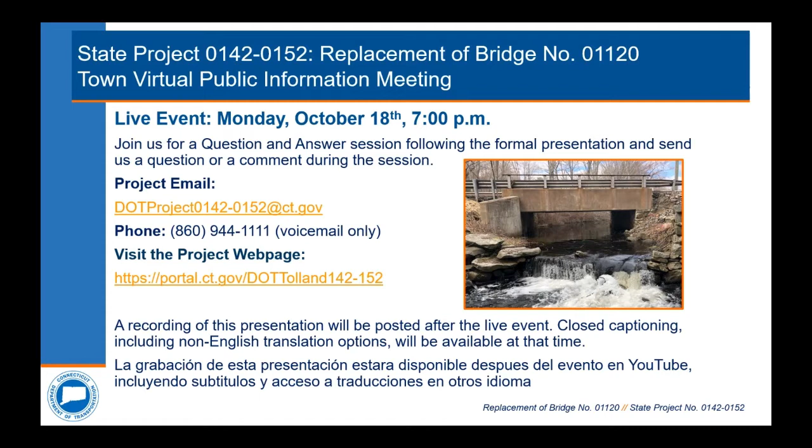Before we get started with the main presentation, I want to walk through the goals and format for tonight's meeting. First, I will explain the different ways you can interact with the project team during the meeting. Next, I will introduce the project team, including department leadership and our consultant liaison engineering team. Then we will have the technical portion of the presentation, covering the condition of the existing structure, the purpose and need for the project, and the recommended design solution, which has progressed to a 30% design level. We will also explain the rights-of-way process, followed by a live question and answer session.

There are three ways that you will be able to communicate with us during the live question and answer session. Questions can be submitted via email, by calling and leaving a voicemail, or if you're joining us on Microsoft Teams, you can use the chat box on the right side of the window. The project email, voicemail, and chat box will be screened by the project team during the question and answer session. All questions will be posted in the chat window, and all questions and answers will be read aloud. Questions may be asked at any time during the presentation, and they will be answered at the end during the question and answer session. The primary means to communicate with the project team will be via email.

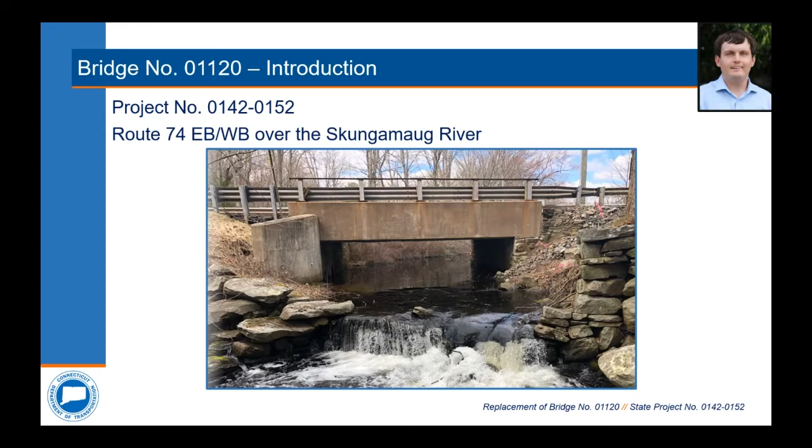I'll be going through some project specifics of the current condition of bridge number 1120, which carries Route 74 over the Skungamaug River in Tolland. I will also present the proposed work under state project number 142-152, which has been initiated to replace existing bridge number 1120.

Bridge 1120 is located here as seen highlighted in orange on the screen and carries Route 74 eastbound and westbound over the Skungamaug River. The Skungamaug River flows in a north to south direction. The bridge is located a quarter mile east of the Country Butcher. The project site limits include both approaches eastbound and westbound along Route 74 as outlined in red.

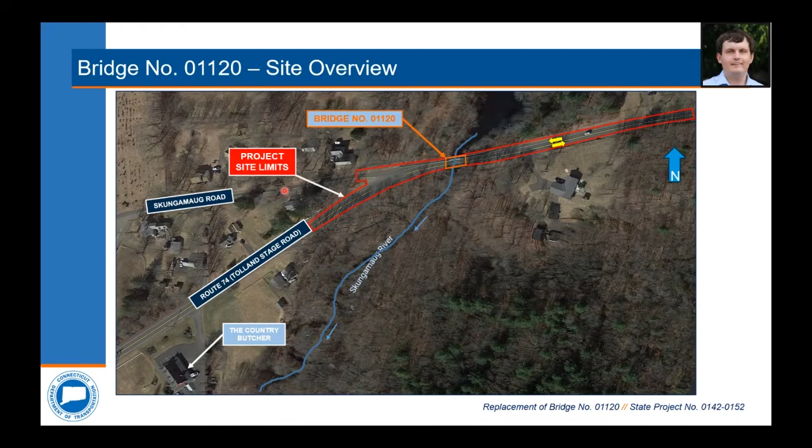In the vicinity of the project site, the land use is primarily residential. There is one residential street, Skungamaug Road, located to the west of the bridge.

This is a plan view of the existing bridge. The bridge was constructed in 1916 and carries an average of 2,700 vehicles per day. The bridge carries a lane of traffic in both the eastbound and westbound directions along Route 74. The curb-to-curb of the bridge is 22.5 feet and consists of a single span with an overall length of 24 feet. The bridge is supported by masonry abutments located on both the east and west side.

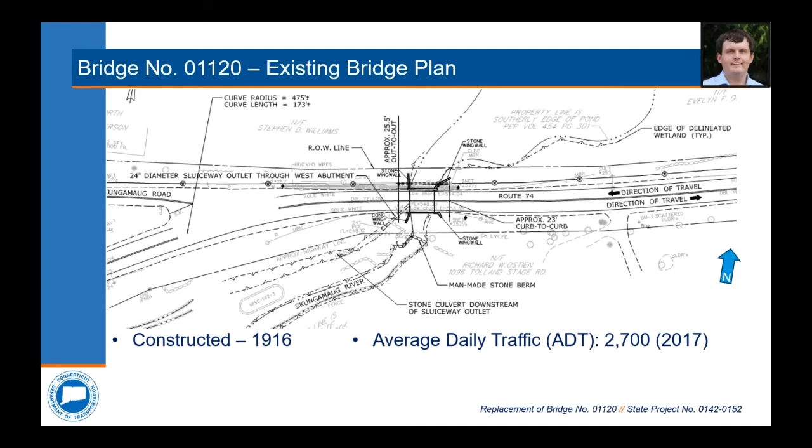Additionally, there's an existing 12-inch water main that runs parallel to the north fascia of the bridge, and overhead utilities are also located on the north side of the bridge.

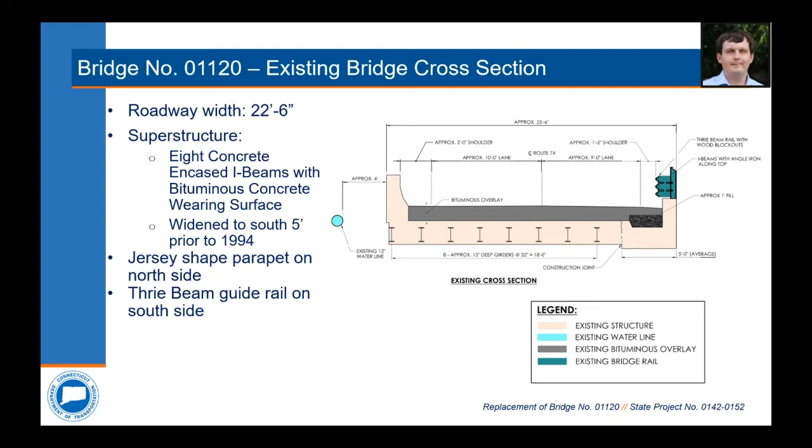As previously mentioned, the existing bridge provides a 22.5-foot roadway and consists of a 10-foot wide westbound and 9-foot wide eastbound lane. The original superstructure consists of 8 concrete encased I-beams. The structure was widened by 5 feet to the south side at some point prior to 1994. The structure is topped with a bituminous concrete overlay. The bridge has a jersey-shaped parapet to the north side and a thrie beam rail with wood blockouts on the south side.

Here you can see the existing south bridge elevation. The bridge has a span length of 24 feet, as previously stated. The structure is supported by stone masonry abutments with an unknown foundation condition, as there is very little information and limited as-built plans of the original 1916 bridge construction. There's moderate potential for scour concerns on this site based on a previous investigation performed in 1998.

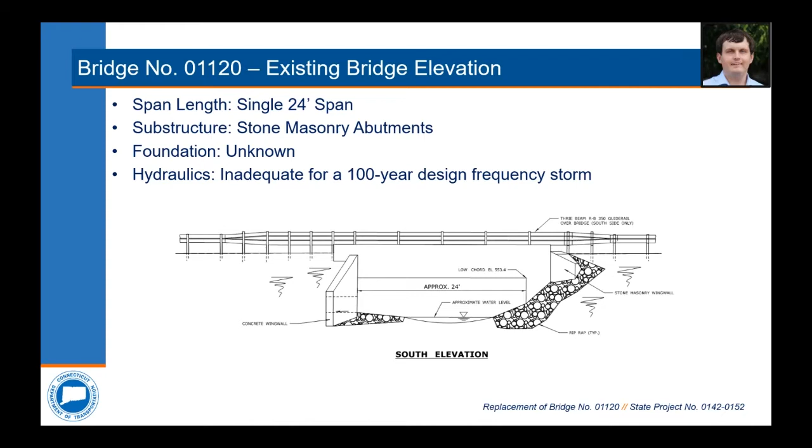As for the hydraulics of the existing site, the existing structure is inadequate as the 1-foot minimum underclearance for the design storm is not met. The design storm is the 100-year frequency storm event for this bridge.

As Brianna previously mentioned, during biennial inspections, the bridge inspectors determine condition ratings for each of the major elements of the bridge. Based on the bridge inspection performed in 2019, the deck is considered to be in satisfactory condition overall. The superstructure was noted to be in poor condition, and this rating is a result of deterioration on the bottoms of the concrete encased I-beams. The substructure and approaches are noted to be in satisfactory condition, and the channel and channel protection around the bridge was also noted to be in fair condition.

The inspectors also look at other elements of the bridge, such as roadway alignment and deck geometry. On this bridge, the inspectors noted the condition of the deck geometry as intolerable, as the existing bridge width is narrower than the approach roadway width of Route 74. Because of this, the bridge is considered to be functionally obsolete.

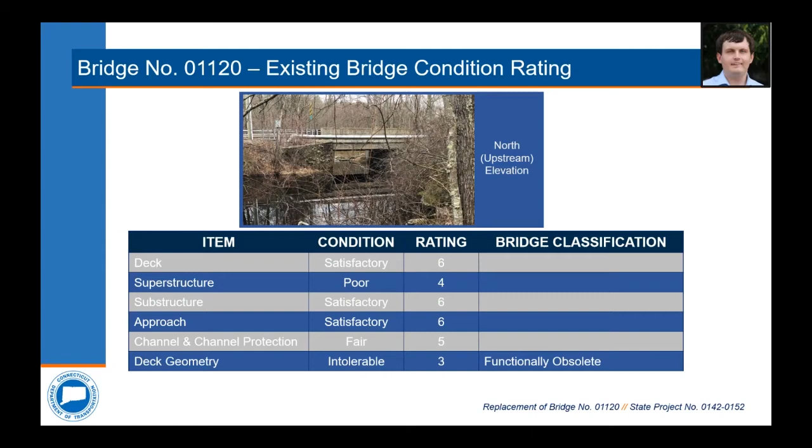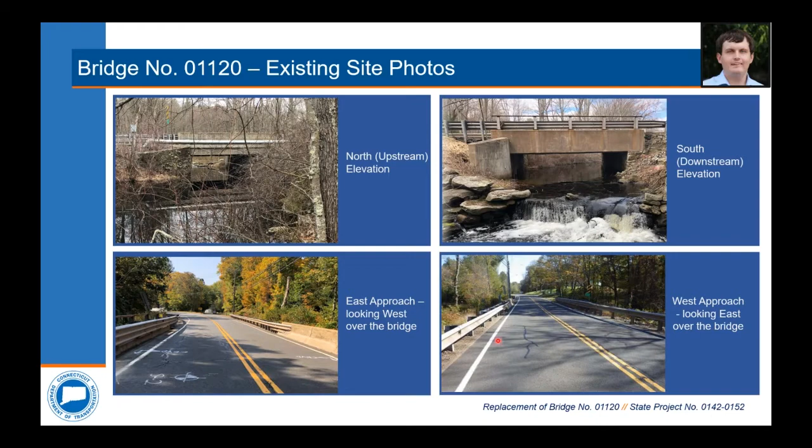The bottom left shows the east approach looking west over the bridge. In this photo, you can clearly see the overhead utilities located to the north side of the bridge. The bottom right shows the west approach looking east over the bridge.

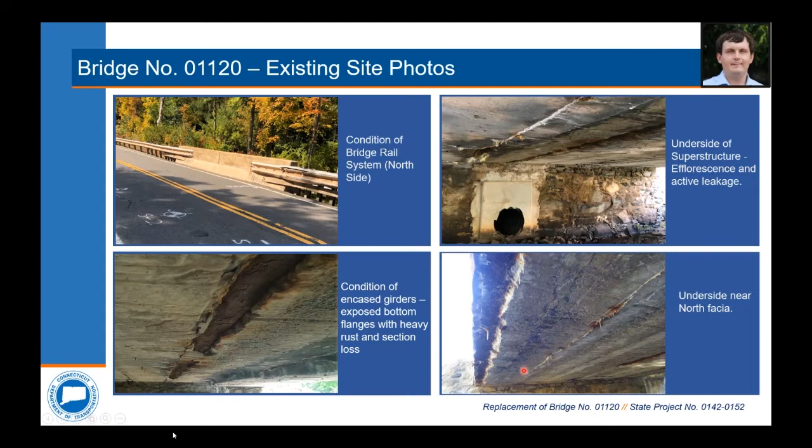The bottom photos show the typical condition of the concrete encased girders. As you can see on the bottom left photo, there's exposed bottom flanges with heavy rust and section loss. The bottom right photo shows the underside near the north fascia. There's evidence of efflorescence, which indicates dampness and active leakage through the deck surface.

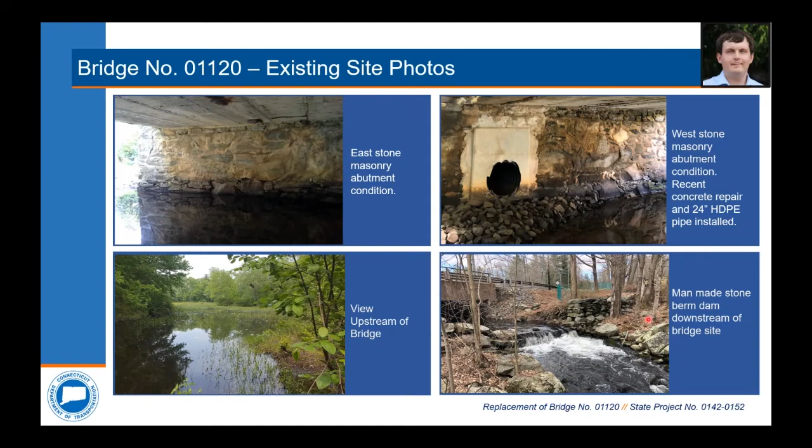The bottom left photo shows an upstream view of the Skungamaug River and impounded pond. And the bottom right photo shows a view of the Skungamaug River downstream of the bridge site.

The primary purpose of this project is to address the poor structural condition of the existing superstructure and address the functional obsolescence of the bridge deck geometry due to the existing curb-to-curb width being narrower than the approaches. Per state and federal standards, a minimum curb-to-curb width of 28 feet is required based on the average number of vehicles which travel over the bridge each day, or 2,700 vehicles in this case.

Also, the bridge is 105 years old at this point, with aging masonry abutments that would require significant rehabilitation efforts to extend the service life of the structure. Lastly, the structure is currently not hydraulically adequate for the 100-year design frequency event.

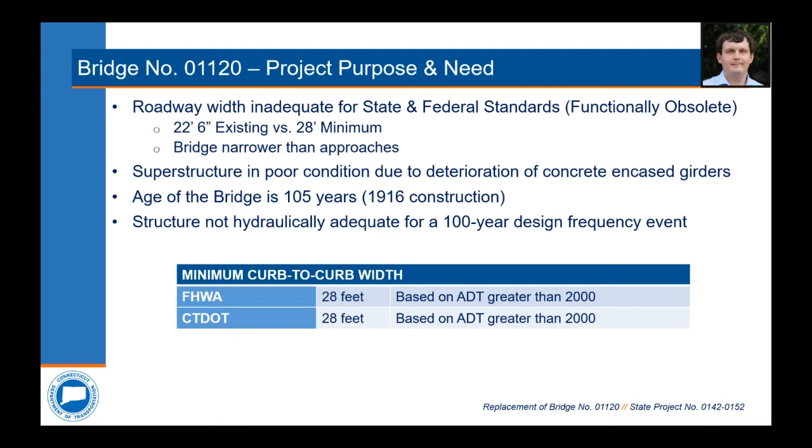34-foot wide roadway, which will satisfy state and federal standards. In addition, new crash-tested bridge rail will be installed on both sides of the roadway. Also, new precast integral abutments and wing walls will be installed to replace the existing aging masonry abutments.

The shallower depth of the proposed superstructure will allow the low chord of the bridge to be raised up slightly and make the structure hydraulically adequate. Water will also be allowed to flow unimpeded under the bridge during high flow storm events.

Additionally, a new horizontal realignment of the approaches on either side of the bridge is proposed for approximately 1,200 feet of Route 74. What this is going to do is produce a flatter roadway curve, which meets the 50-mile-an-hour design speed criteria for the project and allows for the approach widths to match the bridge width.

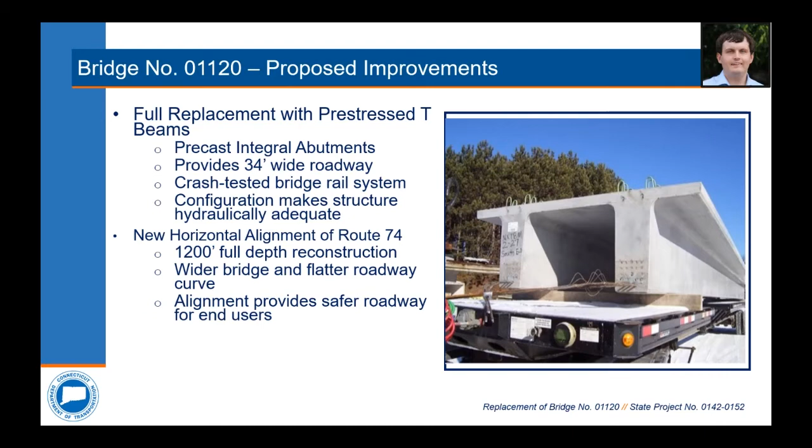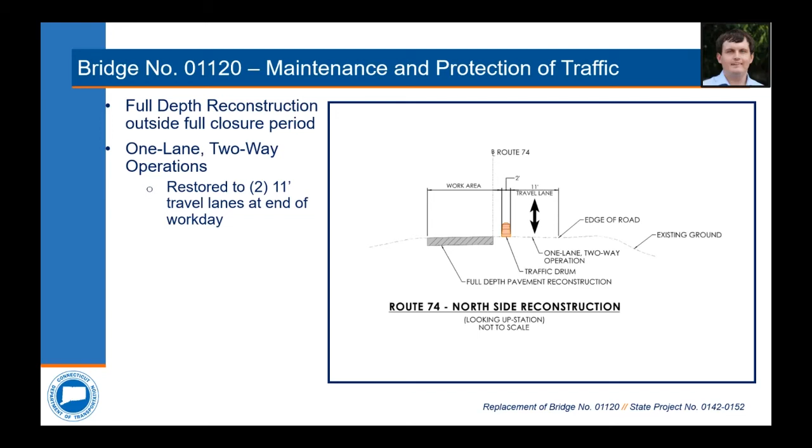To perform the full depth reconstruction and realignment of Route 74, a 1-lane, 2-way traffic operation is proposed. This work is anticipated to occur outside of the full closure and detour period needed to construct the bridge. The contractor is going to be required to restore the condition of Route 74 to 2 11-foot wide travel lanes at the end of each workday.

As previously mentioned, the overhead utilities and existing 12-inch water main will need to be relocated temporarily to facilitate construction of the new bridge. As for the environmental impacts, some tree clearing will be needed for utility and road alignment work. We're anticipating minimal watercourse and wetland impacts at this site, as the full road closure will allow for the work to be performed up top on the roadway surface. The contractor will not need to drive equipment into the wetlands to perform demolition and construction activities.

Finally, for permits with this project, we're anticipating a DEEP inland wetland general permit, an individual flood management certification, and a U.S. Army Corps of Engineers self-verification permit.

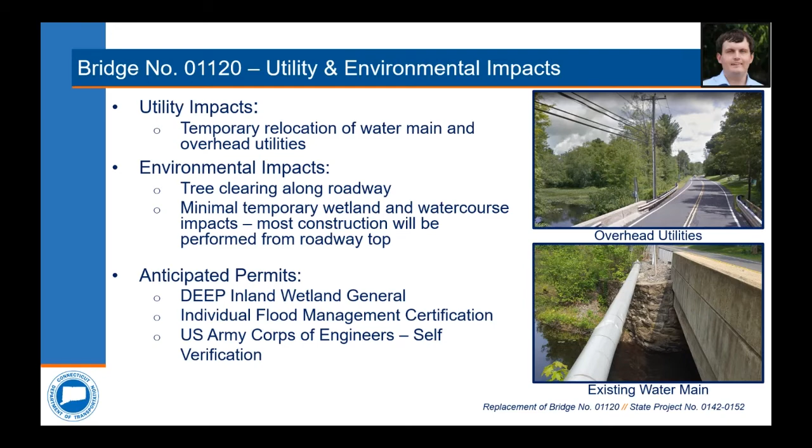There are very few right-of-way impacts anticipated for the project. There's a temporary construction easement that's going to be needed for relocation of the overhead utilities. Additionally, we're anticipating a small slope easement proposed in the northeast corner of the bridge to facilitate grading for a guide railing, and that's within the limits of 1103 Tolland Stage Road. We're also anticipating a drainage right-of-way at the outlet of the sluiceway on the southeast corner of the bridge site.

I'm going to turn it over now to Matthew Giannakopoulos from the Division of Rights-of-Way, and he will describe the rights-of-way process.

I am Matt Giannakopoulos, and I am a right-of-way coordinator with the Department's Division of Rights-of-Way. It is our office's responsibility to acquire the property rights needed for transportation projects. The proposed project design requires the acquisition of property rights, so I'd like to give a brief overview of the Department's right-of-way acquisition process. Please keep in mind, though, that the specific impacts are still being fine-tuned and may change as the design progresses.

Any property rights that will be acquired will be in accordance with Connecticut General Statutes Sections 13A-73 and 13A-98E. And whenever there is federal money used in any phase of a project, the Department must adhere to the Uniform Relocation Assistance and Real Property Acquisition Policies Act of 1970, as amended.

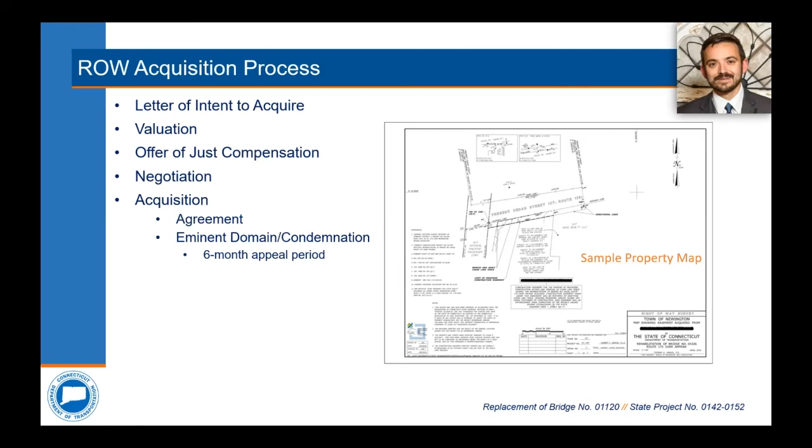I know sometimes people think when they hear eminent domain that it means the state just takes their property for $1, but that's not the case. The owners are entitled to at least the amount of the state's offer, and the state only takes title to the property rights that are needed for the project. If there are any questions regarding the department's right-of-way acquisition process, I'd be happy to address them during the Q&A portion of tonight's meeting.

Thanks, Matt, for a summary of the rights-of-way process. Assuming we receive all approved permits and rights-of-way acquisitions, construction is anticipated to start in the spring of 2024 for this project.

The construction is anticipated to take one construction season, or 8 months, starting in April and finishing in November. The estimated construction cost of the project is $6.25 million at this time. And finally, the construction cost will be covered using 80% federal and 20% state funds.

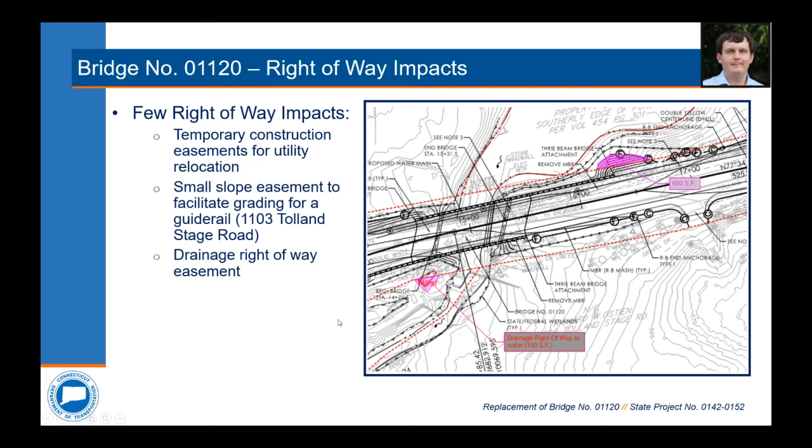Tom, do you want to take this one? Absolutely, Derek. Again, this is Thomas Sautel from CHA. I'm going to go to the roadway plan real quick, just to explain what's going on here. So the simple answer is that we want to do a 1,200 foot full reconstruction and realignment of the curve located west of the bridge site to fix the poor alignment and curve of the existing roadway. Additionally, the existing bridge is narrower than the approaches to the east and west of the bridge, and currently the curve does not meet the 50-mile-an-hour design speed standards for this bridge.

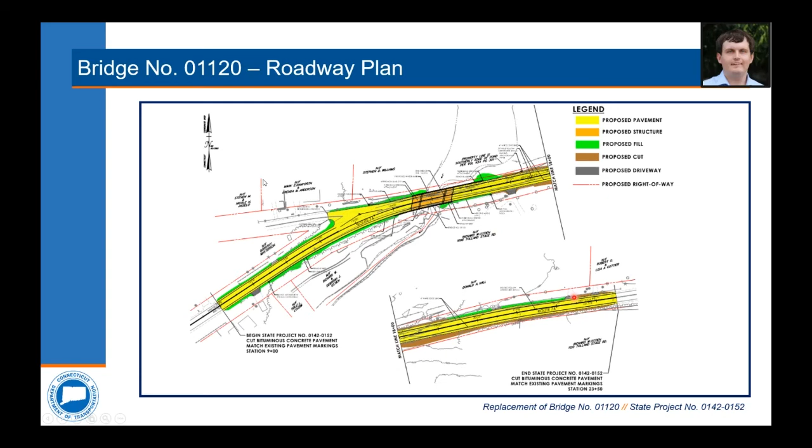Now, in general, since this has got a posted speed limit of 45 miles an hour, roads in general are posted 5 miles an hour lower than the design speed, and the reasoning for that is primarily for safety. As you can see here, this is a wider and flatter curve that's going to be brought up to the design standards, and it's going to create a safer condition for all users as it's going to improve sight lines. Thanks, Tom.

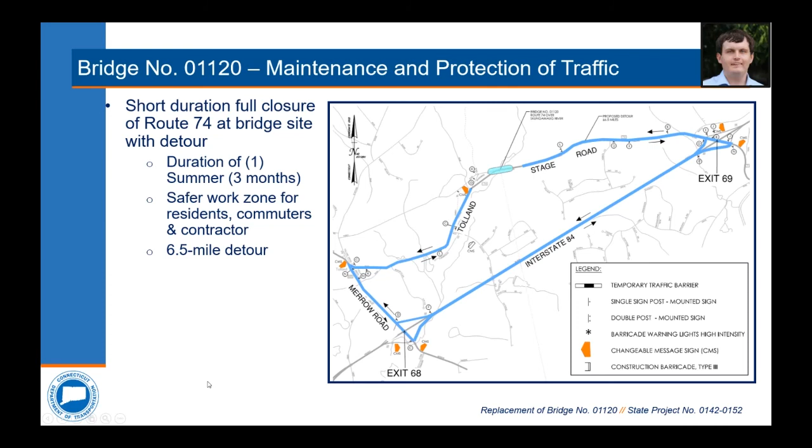So this is Derek again. We had another question here from Jen. The question is, who is going to pay for the ambulance stage at Winding River? So Jen, that's going to be covered under the construction costs. As I mentioned before, construction costs are being split 80% federal funds and 20% state funds. So we're going to be meeting with the town and working that out.

We're going to have some agreements. We still have to work out the details. As I mentioned, we're at the 30% design level, so we have a little bit of design left and coordination left to do with that. So we're going to be working directly with the town. However, it'll be funded through our construction project to pay for that.

I know the bridge is very narrow out there today, so when we redesign and replace it, we're going to be bringing everything up to standard. So we have a 5-foot shoulder on both sides with two 12-foot lanes that are anticipated. It's understood that the bikers obviously are going to be on the roadway, but we're going to have a much wider area there for space for these bikers to pass through. So, but to ultimately answer your question, there's not going to be a designated sidewalk on the bridge.